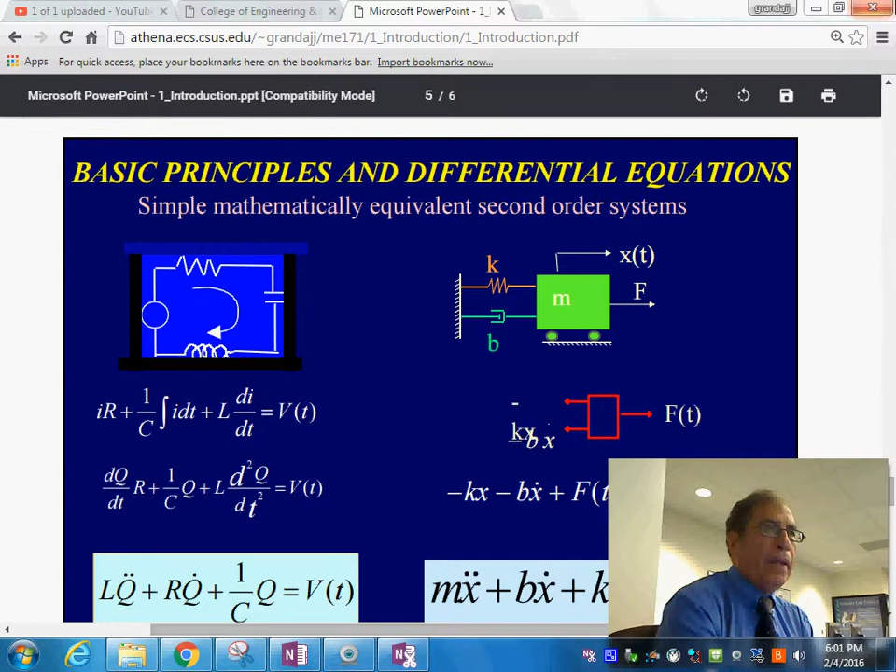Okay, so what I would like to do is to review this a little bit in here, how we do these differential equations for both kinds of systems. We have on the left the electrical system, and on the right the mechanical system. The reason I would like to do it this way is because I want you to see the similarities in how we analyze each one of the systems.

Because when you think about it, we need to do systems that are in both energy domains. But first of all, we're going to see that certain things are very similar, and there are elements in one system and the other that have about the same kind of functions, but in different energy domains. So we'll explore this system in parallel, both on the block diagram as well as on the bond graph method. So first, because we have the equations in there, we're going to go with the block diagram method.

And so we'll begin now by looking at this slide and seeing that we have a differential equation in here. The differential equation has been modified, and we have the differential equation on the bottom, even further modified to write it in this format down here. On the mechanical side, we have the system itself here. We have done a free body diagram of the system over here, and the differential equation has been derived applying Newton's law.

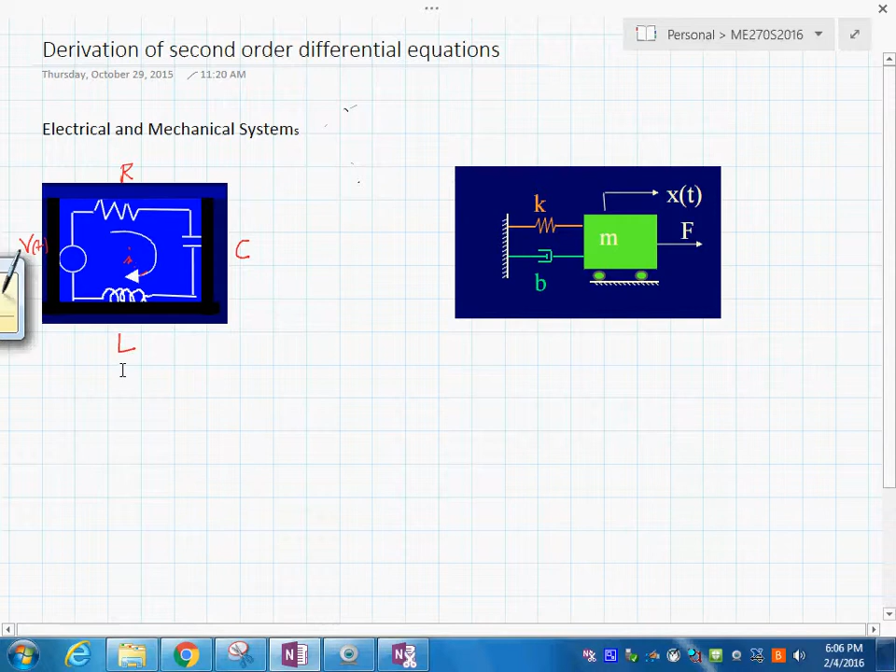So remember I like writing steps. So we could put the steps here on the electrical side, maybe I'll just do it here. Okay, let's just call it the steps. What did I just do? I moved it over when I shouldn't. Okay, here. Steps.

Okay, the first step would be, I would say, recognize the elements we have. So we have done that. It's got an R element, a C element, and an inductor in there. Then the second thing we're going to do is to write the equations according to Kirchhoff's laws.

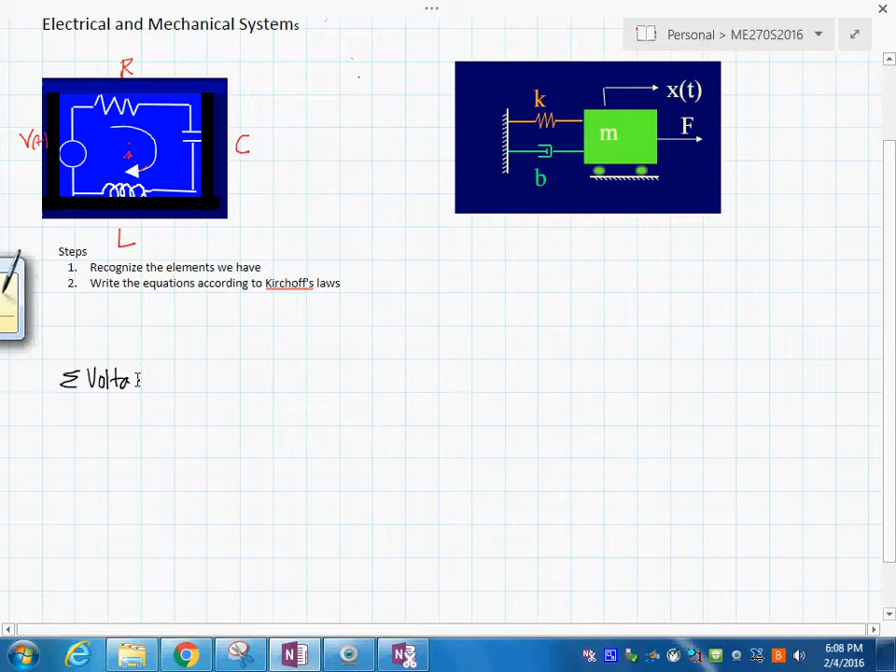So this is the situation here that we need to apply those laws right now. So let me leave a little space so that we still have some place to write, but I am going to begin right here. Okay, so Kirchhoff's law says that the summation of the voltages around a loop is equal to 0. Or you could say the source voltage is equal to the voltage drops of each one. You have voltage of R plus voltage of C plus voltage of L.

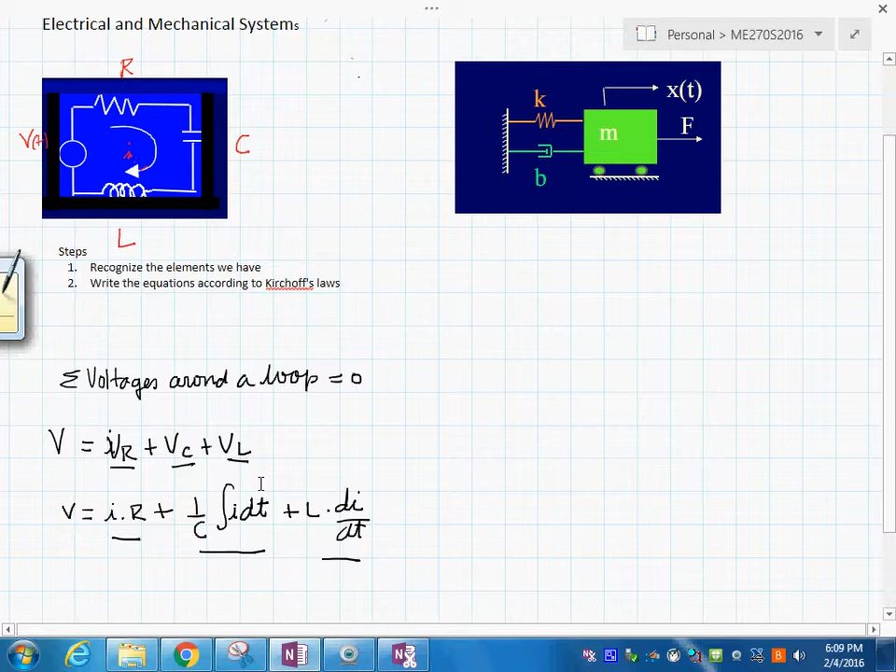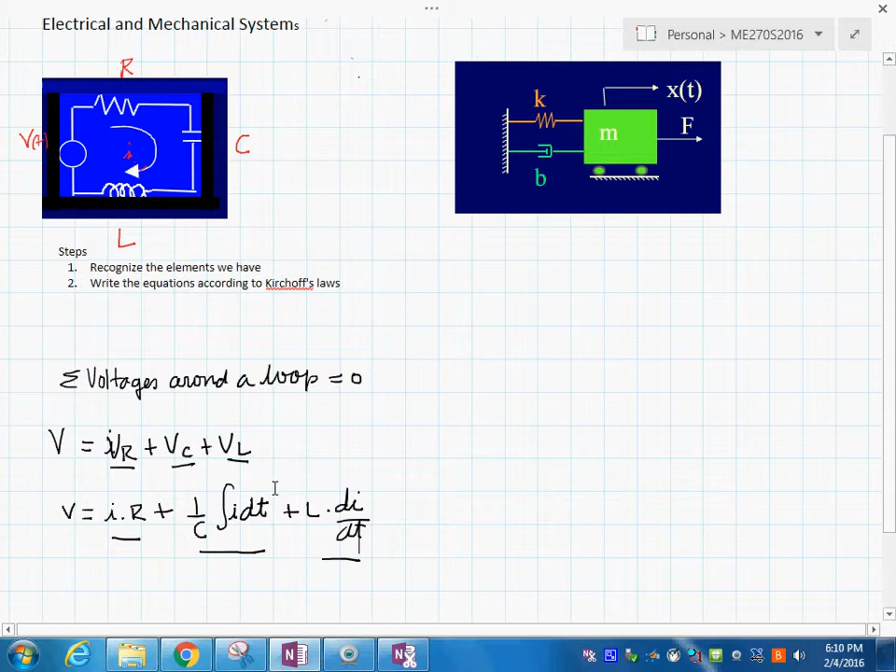So if this is true, you will have that voltage equals I times R plus 1 over C the integral of I dt, and then plus L times di/dt, see? So this is the voltage on the resistor, this is the voltage of the C element, and this is the voltage of the inductor. So you see, here we have this differential equation, but it is written in a mixed format because it has integration and it has differentiation. And we cannot use it this way. We need to have it all as a differential equation.

So what we need to do is replace the current with its equivalent, dq/dt, see? So if this is true, therefore you have that voltage is equal to dq/dt times R plus 1 over C times the integral of dq/dt dt, right? Plus L times d²q/dt². So we put it in terms of the q variable.

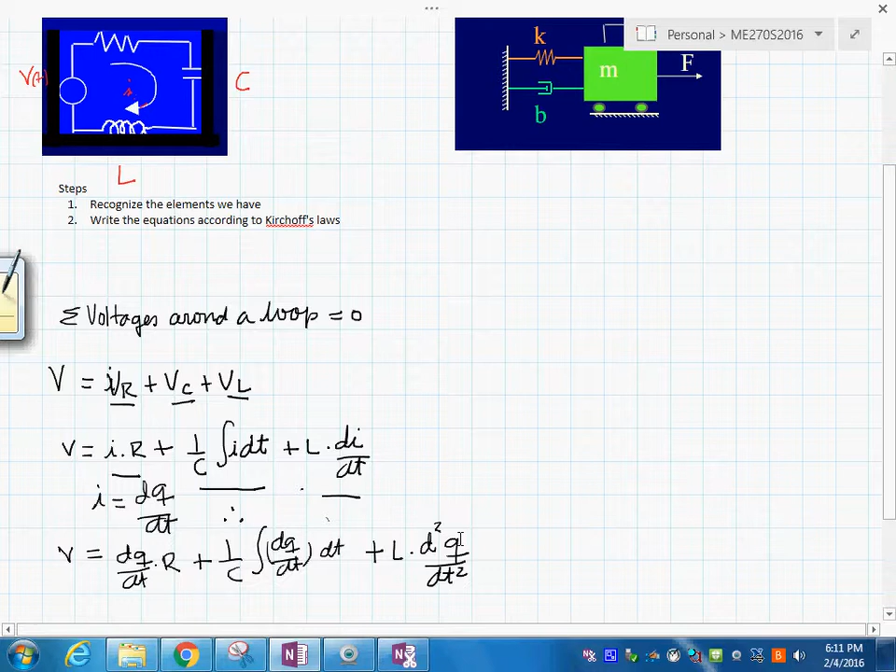So let's reduce this. You can rewrite this equation in terms of the highest derivative. You can say that L times d²q/dt² is equal to v minus R times dq/dt minus 1 over C times q. See?

So what we need in this case, as a third step after we apply the Kirchhoff's law, you could say: express the differential equations in second order form, meaning do this substitution of variables that I is equal to dq/dt, and then we have a second order differential equation. And then organize in terms of the highest derivative. So the highest derivative term is L d²q/dt².

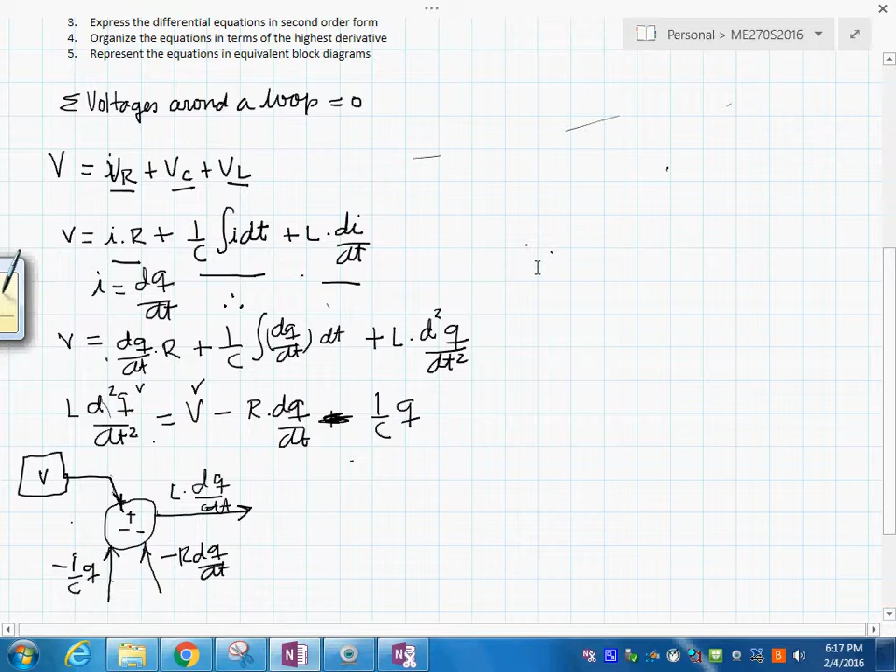Okay, so here you have this v. So we have checked this term. And now these other two, they are two negative ones that we need to add to this block diagram. One of those is going to be like a kx type element. Okay, so we're going to write the other two in here: minus 1 over C times q and minus R times dq/dt. See, again with minus signs, plus minus minus. This is the very basic graph so that we can actually draw the rest of it.

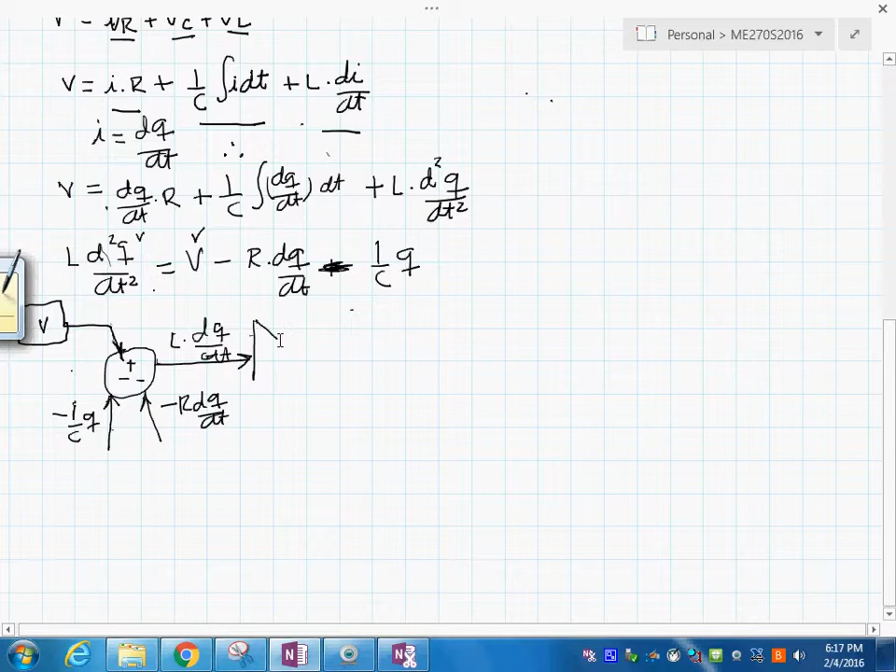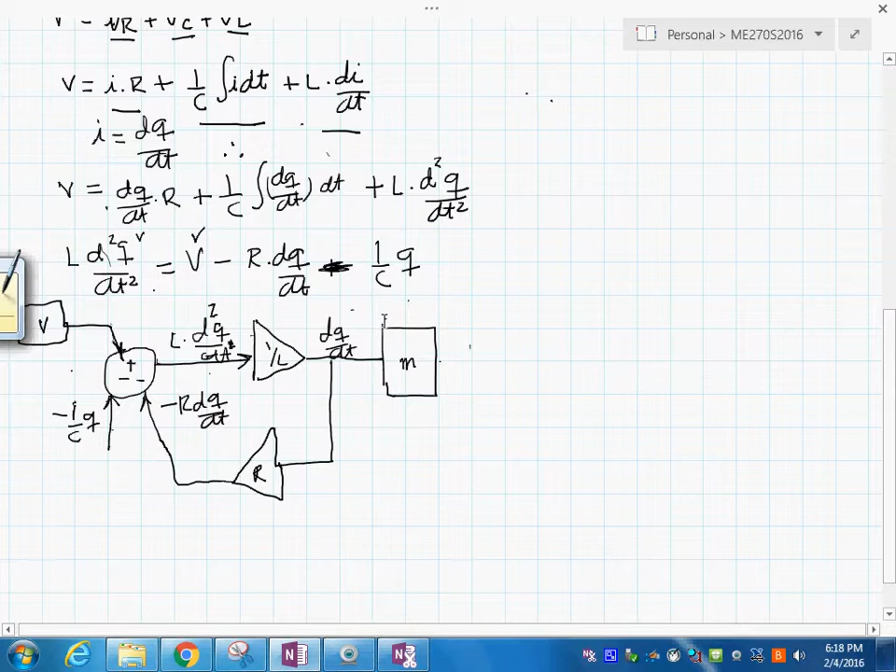So here, what we need to do is first we divide by L, then you have that this is dq/dt. Is the dq/dt a second order? No, the one at the top is this one. So you see, this has R times dq/dt. You have this dq/dt, and then you multiply by R. And the second one is 1 over S.

I think we have a little bit of correction to make here. We need to integrate this thing twice. So here we're going to integrate once, and then 1 over S the second time. So this would be dq/dt, and this one here, see? This would be q.

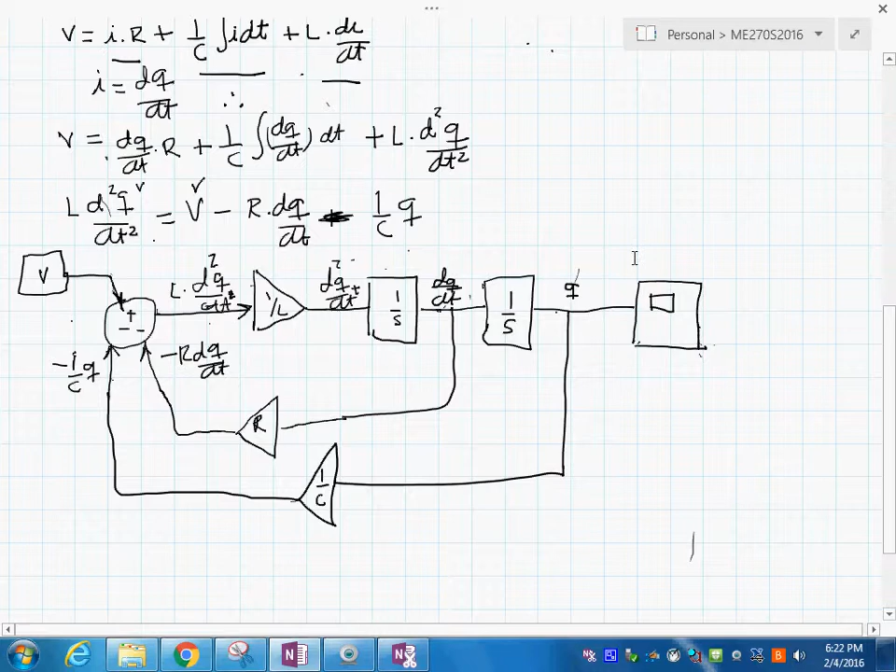Okay, so we are ready to put it into Simulink now. And that's what we should do next. And then we should try the mechanical system later on. This is the idea, this in here. Okay.

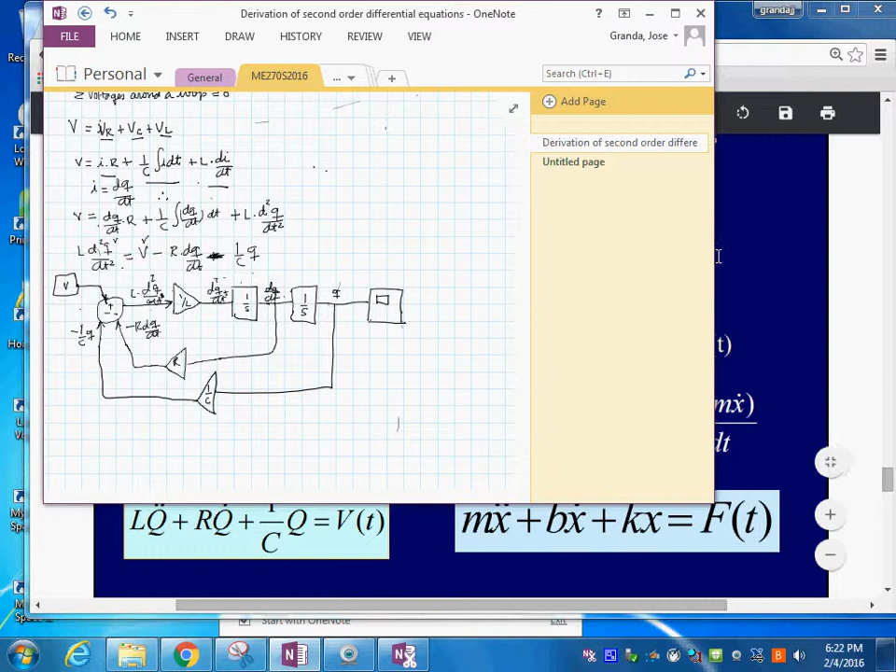So we'll reduce it to the point that we could just see it on Simulink. So we're gonna leave it here for now, and then we're gonna go and start MATLAB and go to Simulink. All right.

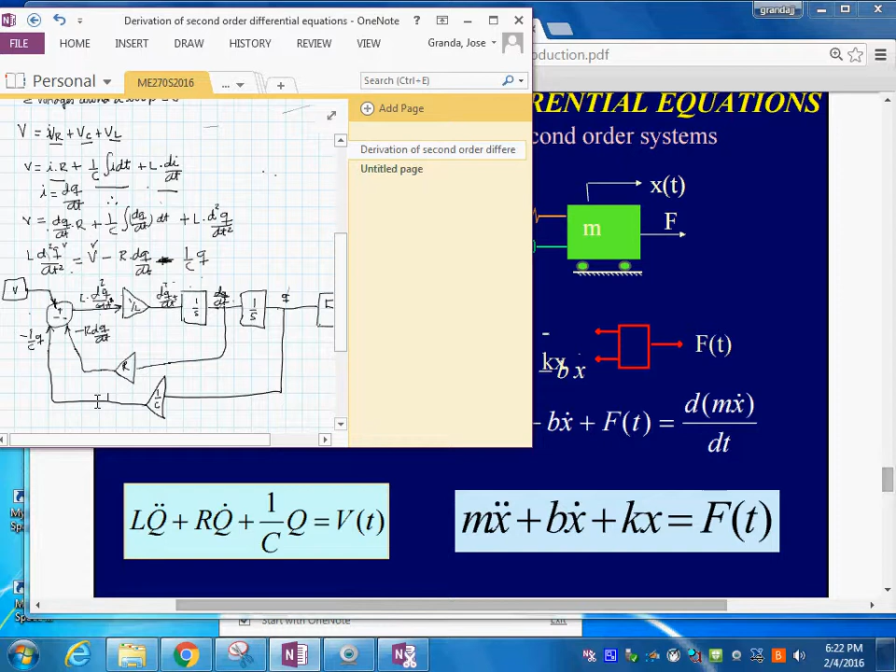Okay, so we have to wait for a moment until MATLAB comes up, and what we're going to do is to get the description of this block diagram into Simulink. So we have to wait for a little bit until we get the MATLAB prompt. At the prompt, we enter the word Simulink, and MATLAB will actually run Simulink, which is a tool from MATLAB.

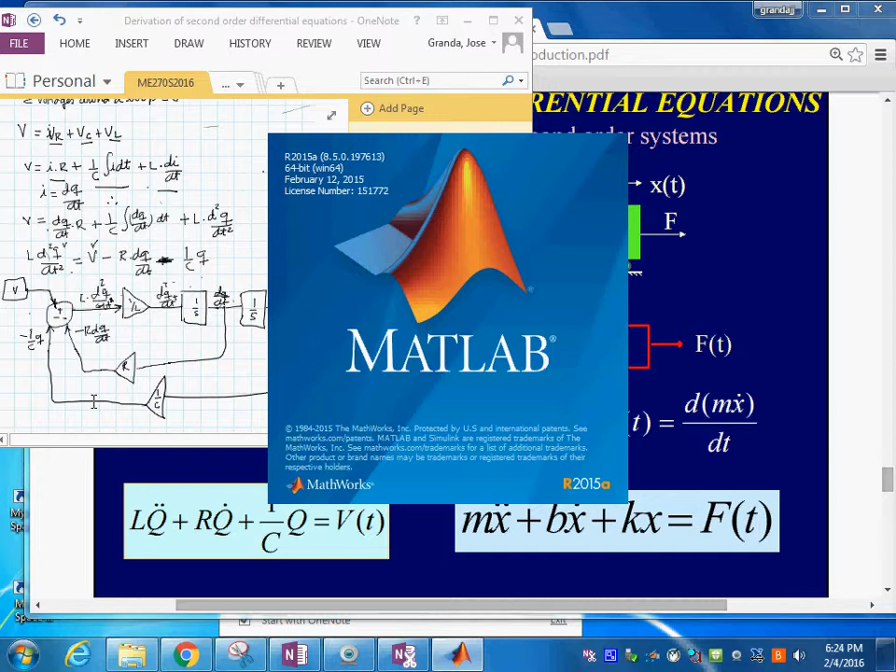So MATLAB has a bunch of other tools for calculation, but in here for this purpose, we want a file that can load things ahead of time, so it won't be so slow. So a little bit of waiting here until MATLAB comes up. Yep. Okay, so now it came up. We are at the prompt and we're gonna type Simulink. Oops, no.

Yeah, we type Simulink, and so now what it's gonna do is give us a workspace in there, some section of the disk that we can write and do exercises.

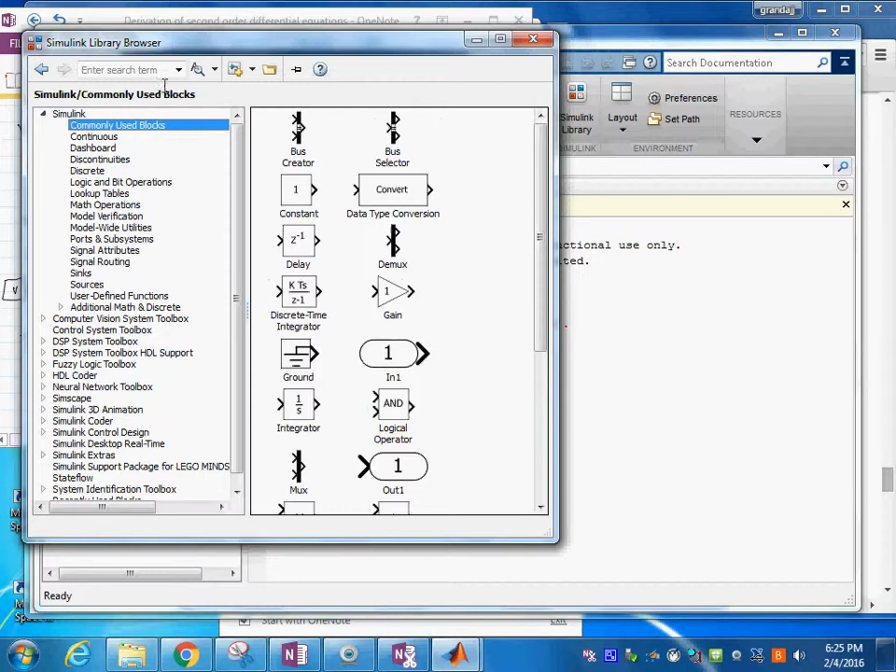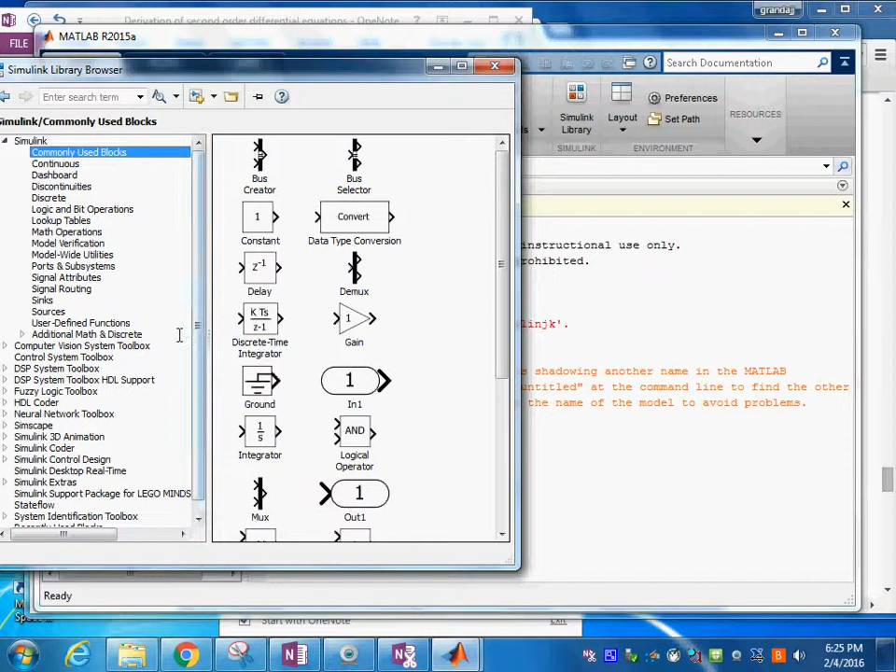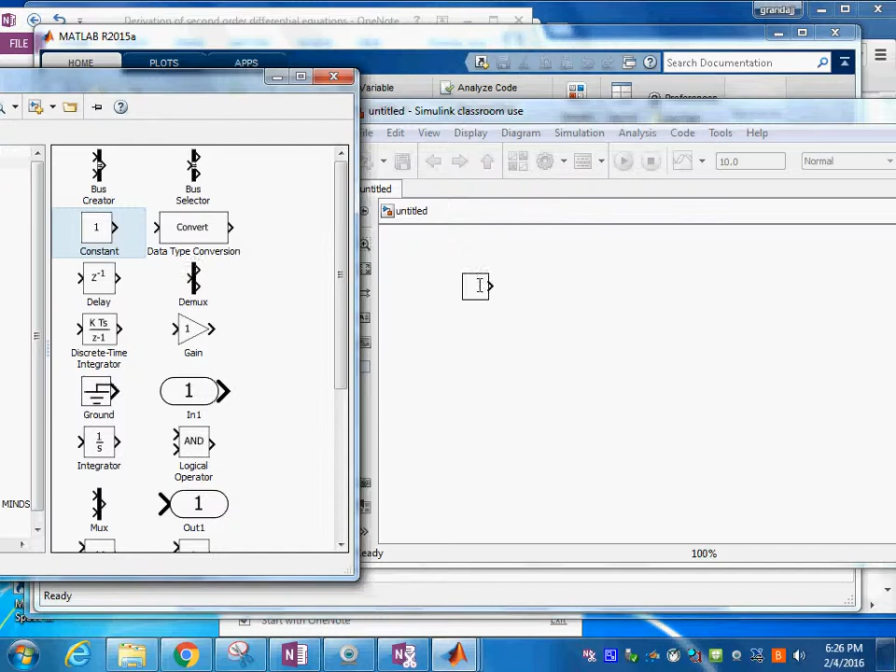There we go. Simulink came up and gave us this. If you click on new file, then we can transfer everything. Yeah, there we go. We're gonna transfer the elements that we need. We need like 3 of these.

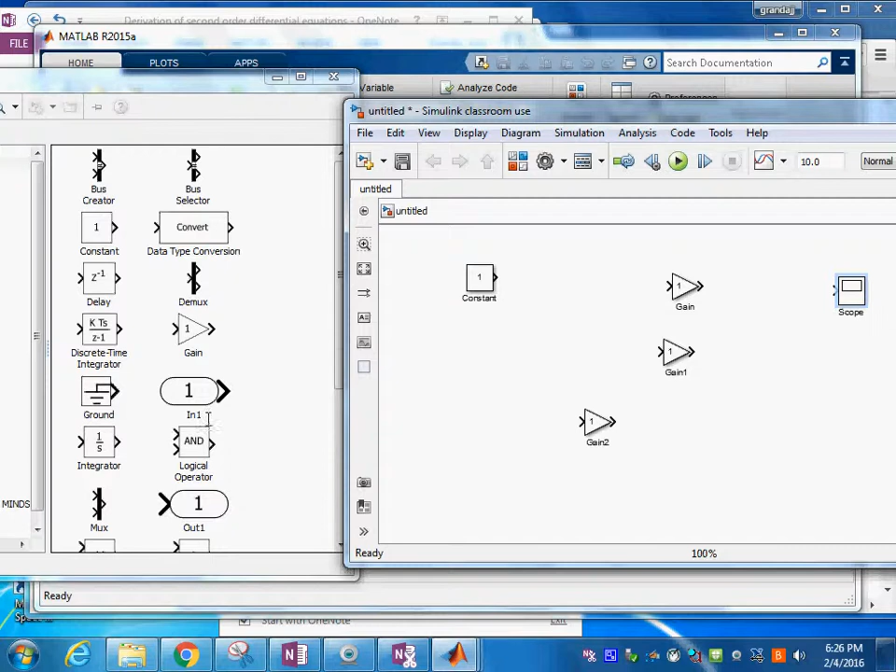Okay, so we still need some others from here. We need a scope. The scope allows us to measure things. Okay. We need the summation point. Where is the summation point? On one end. Right here. And I believe that's about right.

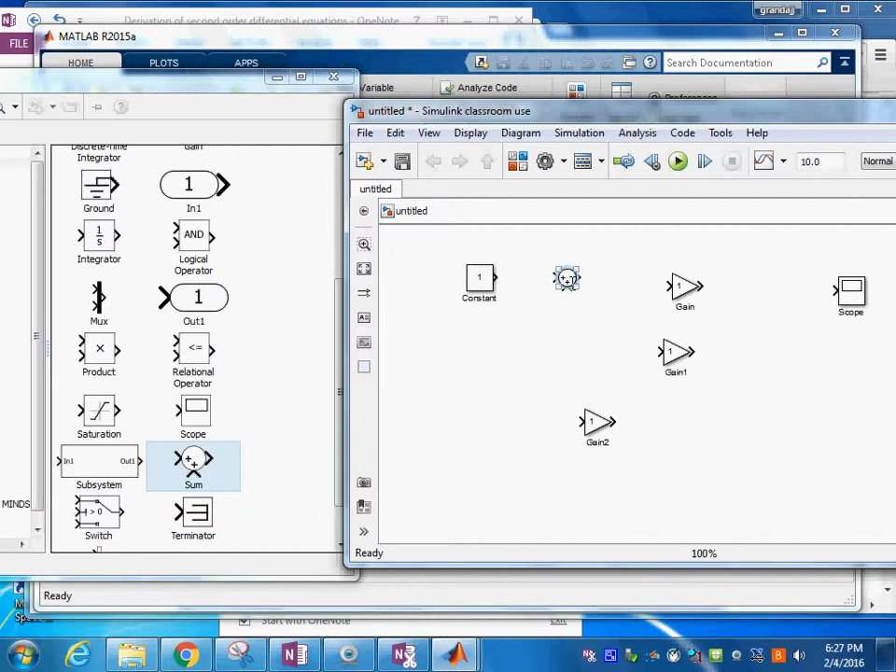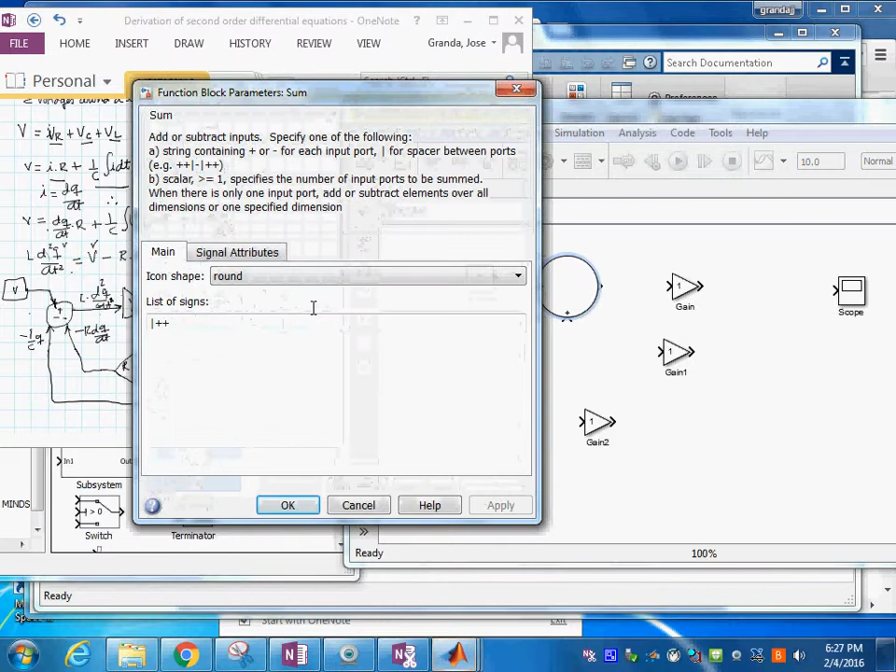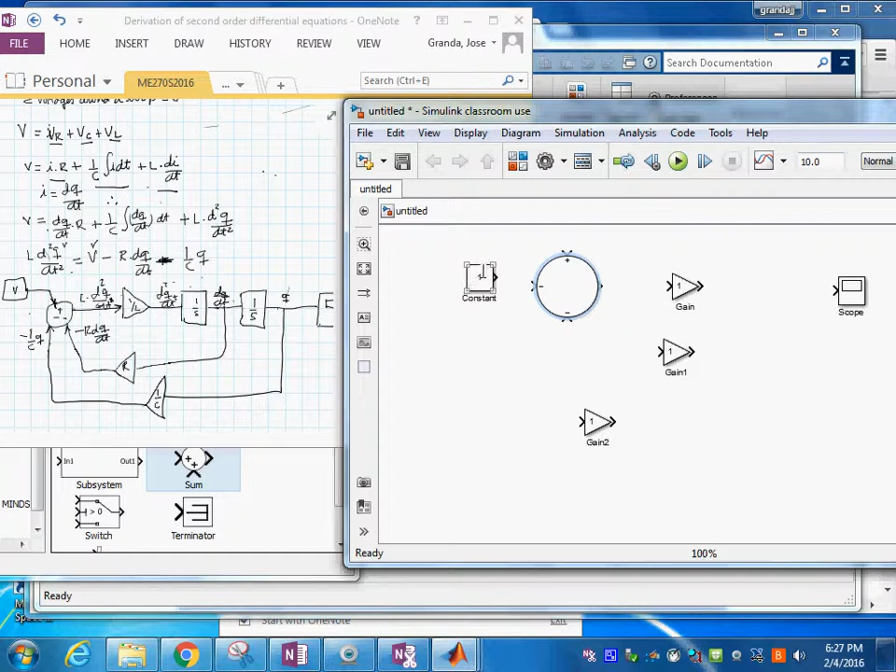So what we need to do is on this one, you see, we're gonna rename it the way we want it. Yeah. So here we have, oh, we have to put 1 positive and 2 negatives. So positive, plus, and minus, minus. That allows us better distribution. And then you have these ones.

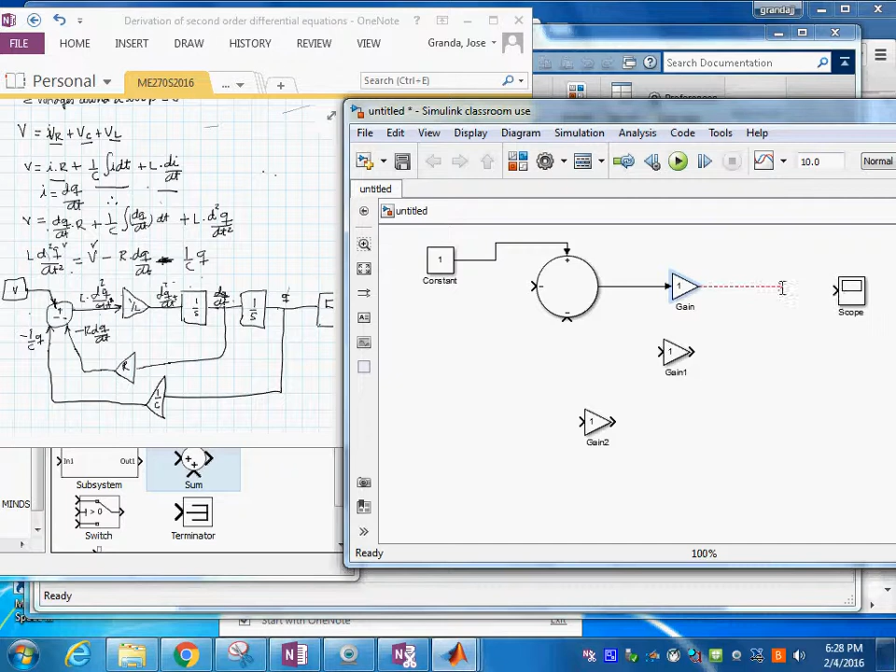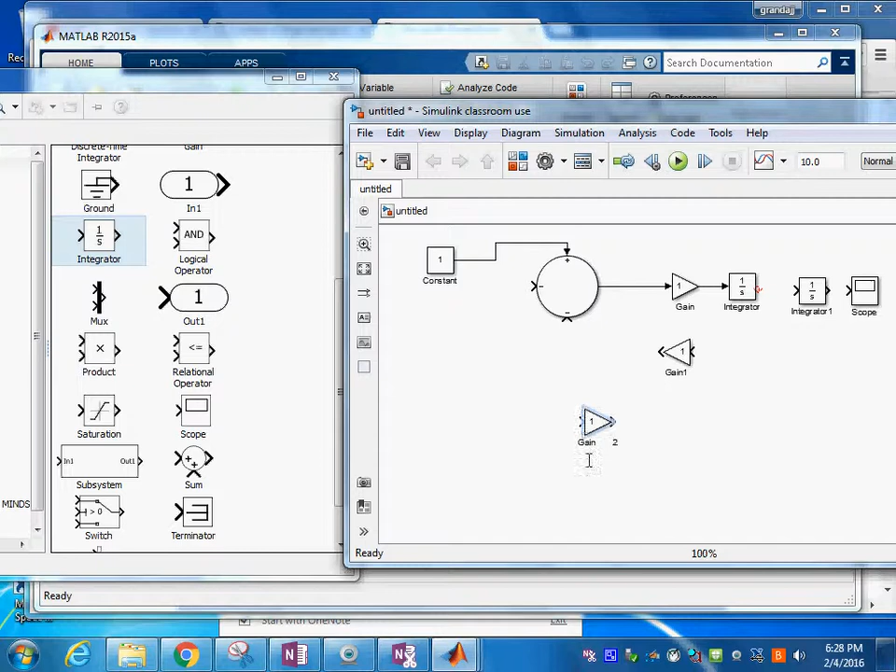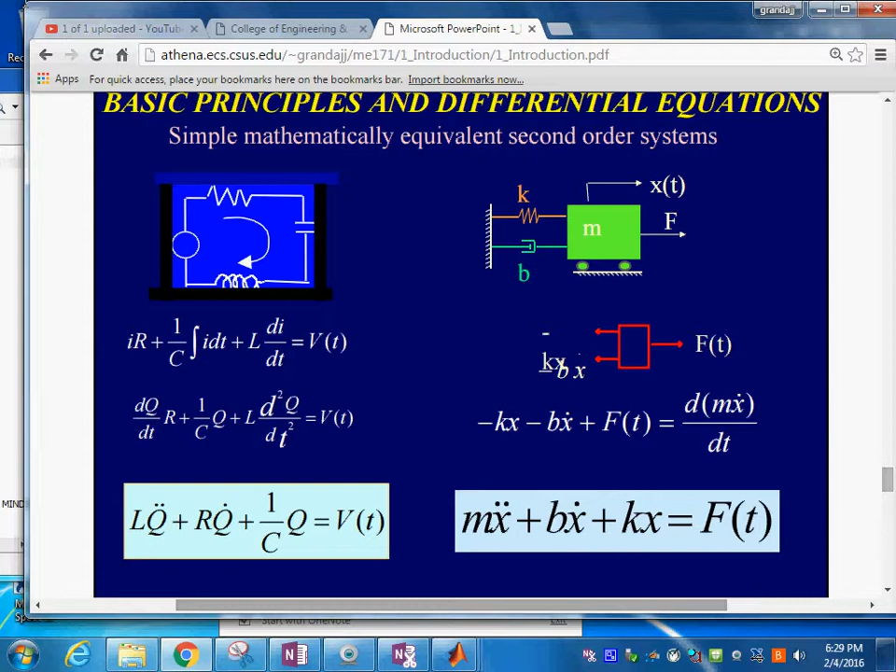We need the integrators. I knew there was something that we're still missing here. This one. We need 2 of these guys. These ones, we need to flip them over. We do a Control I. Yeah. So in here you have this. Oh, we still need to fix this.

And then we're gonna put this one connected to this. This one didn't make quite a good connection.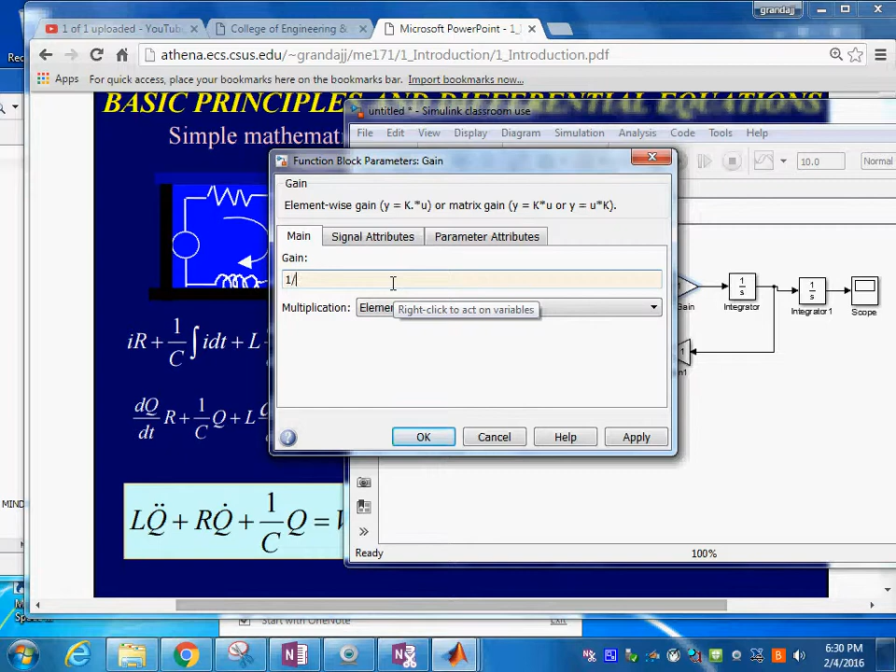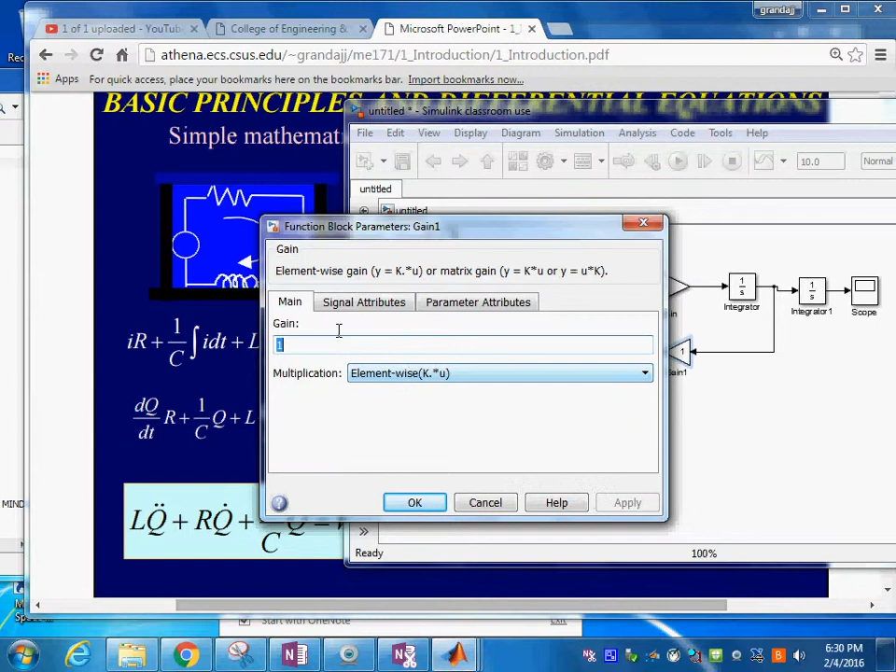So we need to put some values into this. This is going to be our voltage. We're gonna use the letters. So this is 1 over, was 1 over L, right? Okay. And then let's just make it a little bigger so we notice the way it is. This is the B variable.

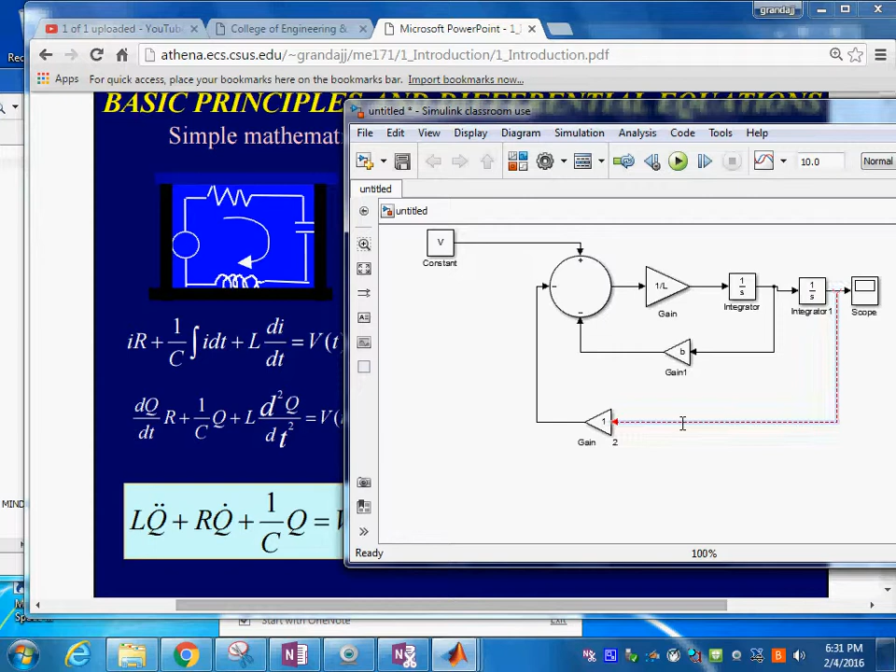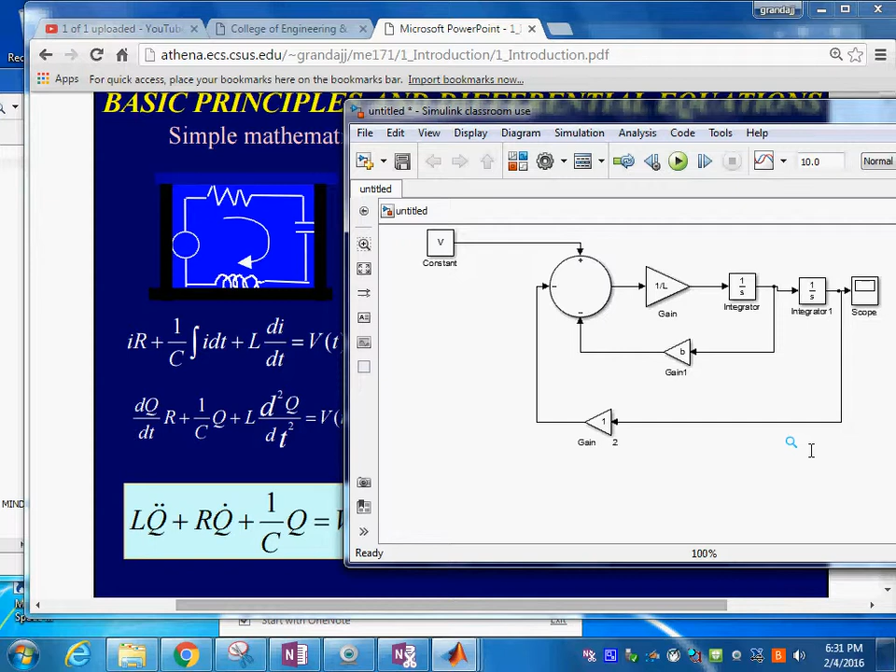And we have what happened here. We need one last connection to this. It didn't quite do it. If it is red, it's not connected correctly. Yeah, there you go. So if we had some numbers and values in here, we just run the simulation.

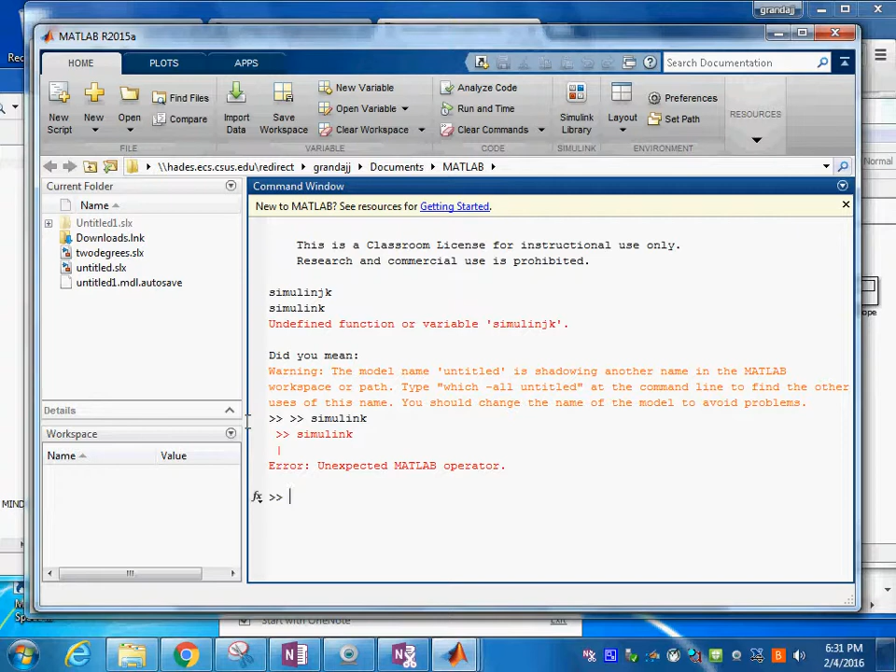So we're gonna use this in here and put the numbers in here. The numbers would be something like L equals 1. What else do we have? K. Let's see. What else do we have? We have L you need to define, and R and 1 over C and B.

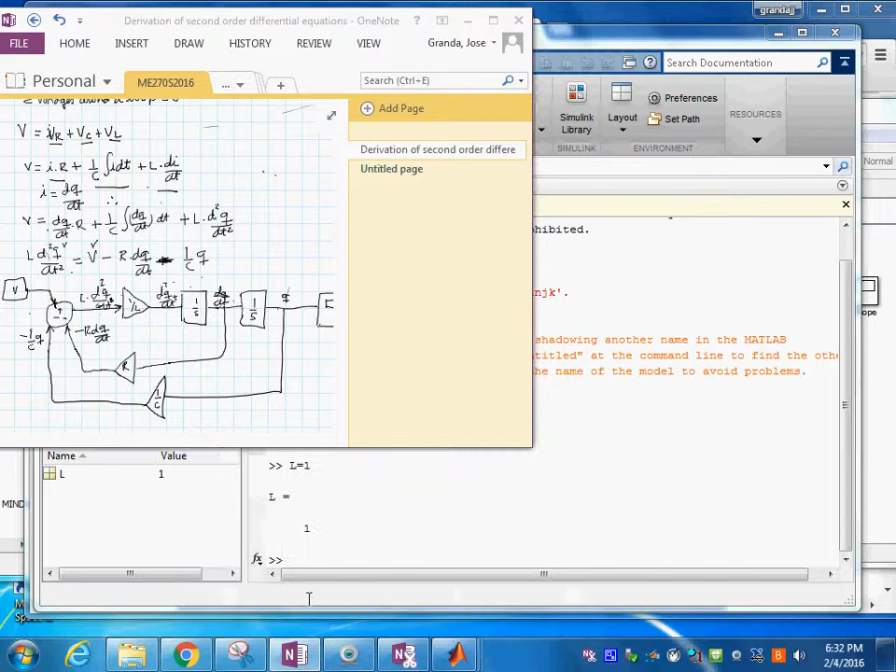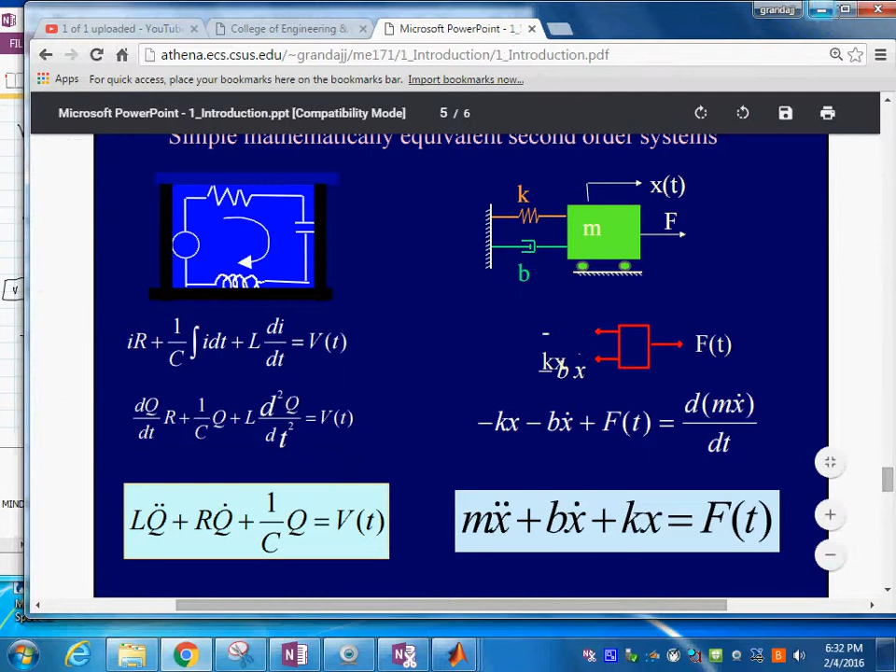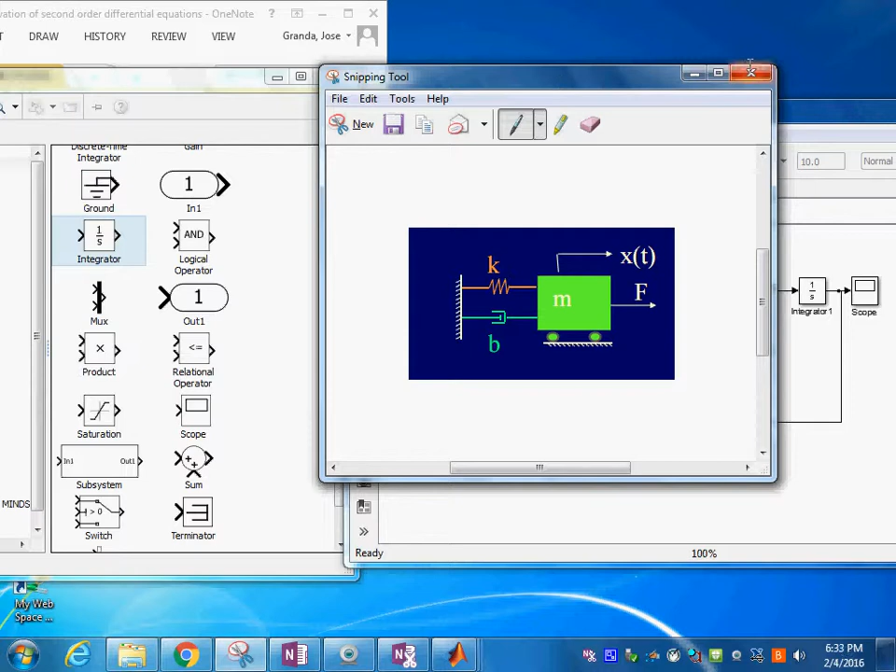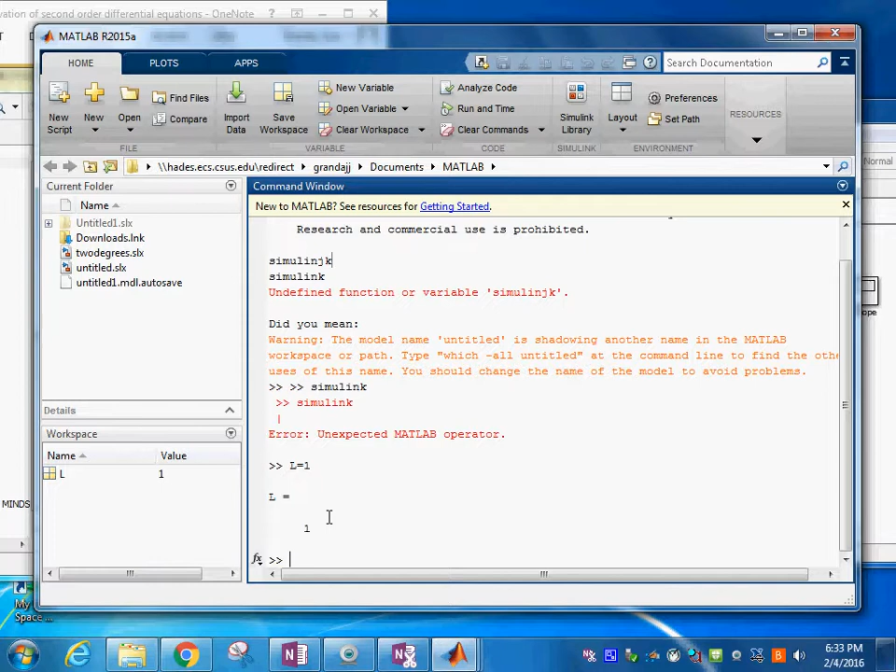So now we have transferred this into this. So it's time for us to give it some values and see if it actually works. So I am going to put this... so where's the MATLAB prompt? Right here. So L is equal to 1, R is equal to 2.

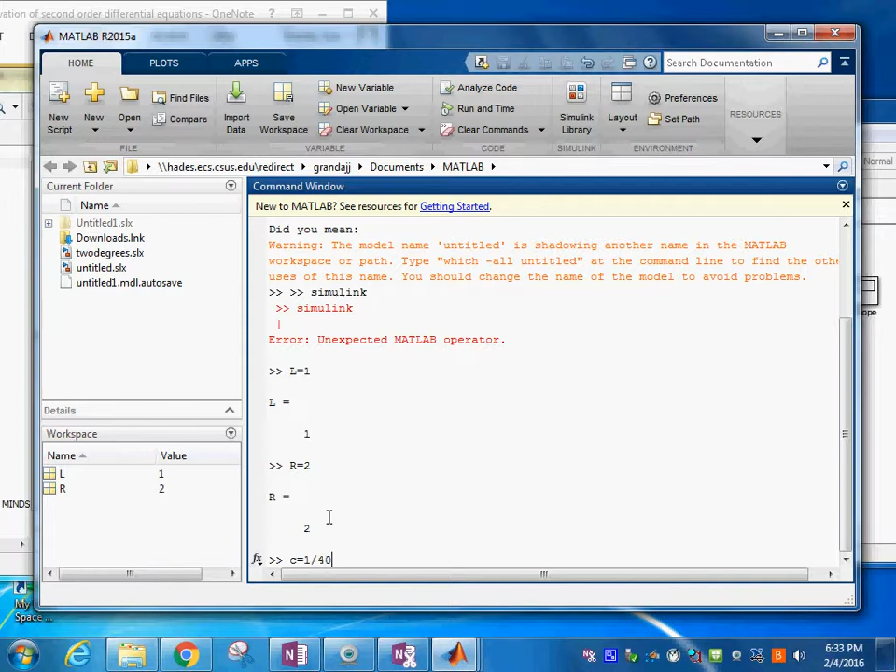Then we have L is equal to, see, they are what? You already defined L. We need to define C. I think it's lowercase c. This is going to be 1 over 40 like this. Okay, and then B. B is, this is going to be a 5.

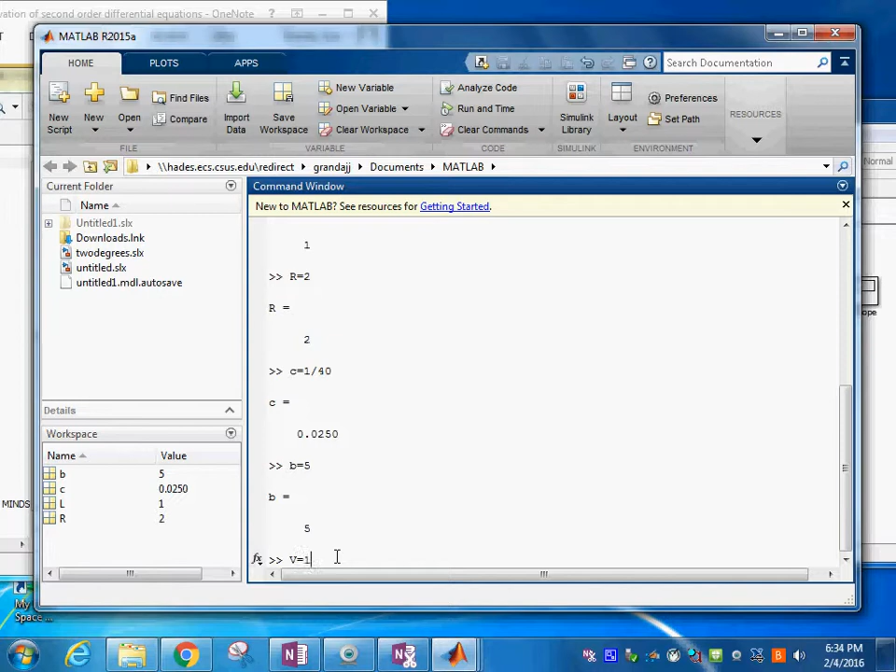It's not that, it's B. What? It's the voltage. So V. Oh, the voltage also we need. The voltage equals 10, let's say. Yeah, with all these values in, we can go in here and then run the simulation.

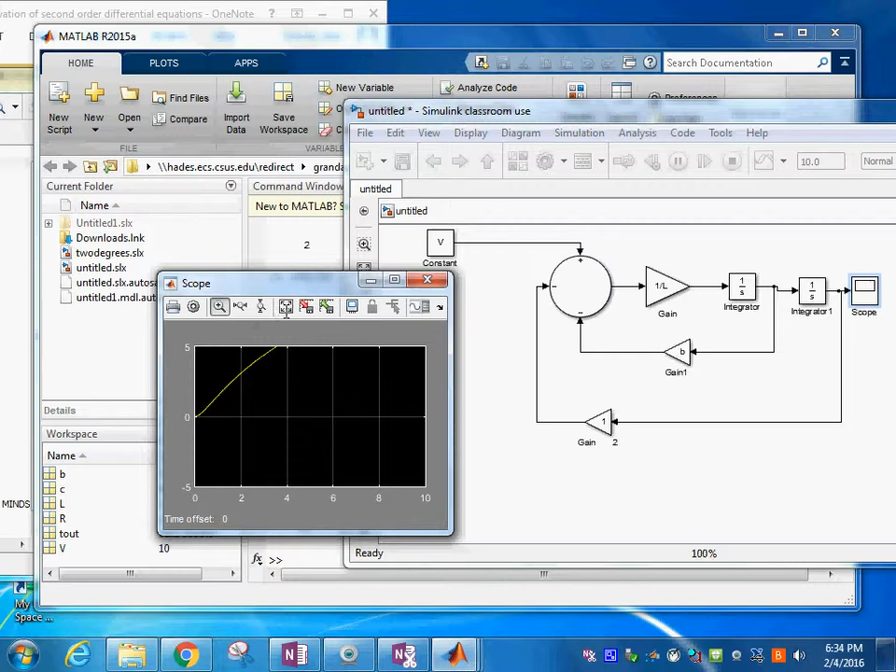You're missing the variable. Am I? Yeah, one. Which one? Oh, you're missing. Something is, okay. What variable do we have? C, 1 over C. Oh, this one is 1 over C, like this. Okay. So let's try again. The other triangle is off. Yeah, we do this, then everything is cool, and it's actually correct.

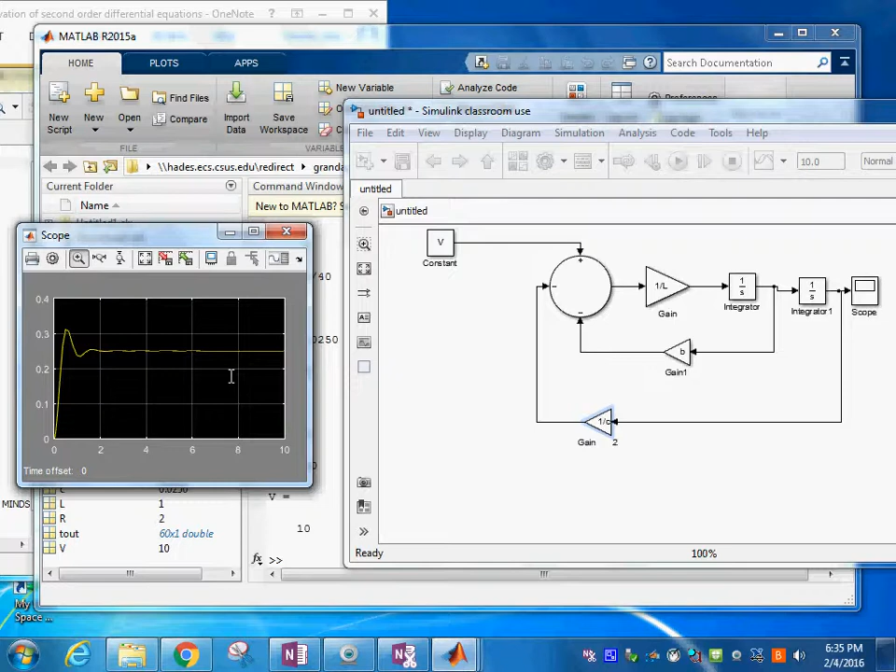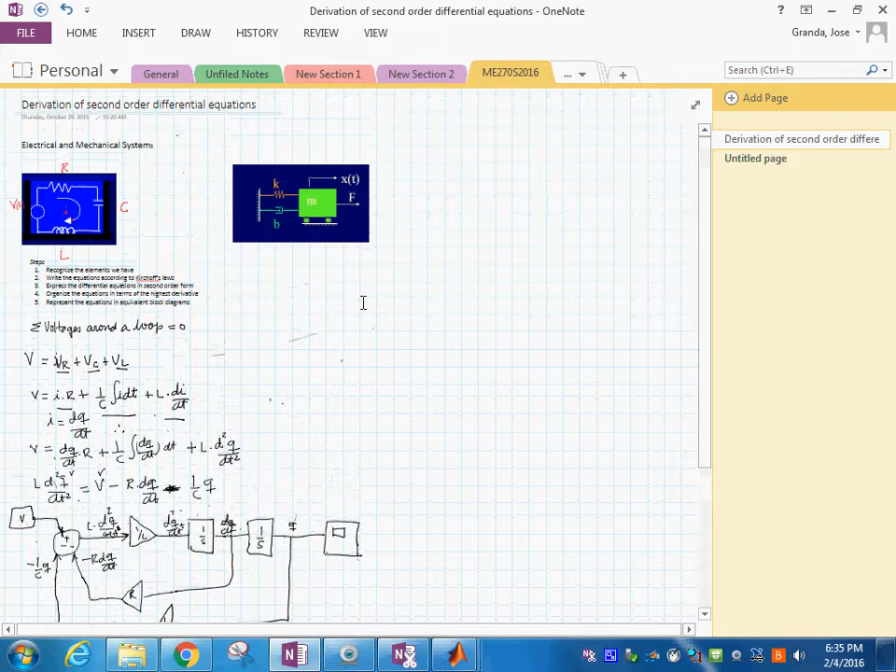So this is the simulation for the electrical system. So we have gone through the steps. Let's just review the steps in here to make sure that we have it all in one place, what we did. So represent the equations in equivalent block diagrams. Then you could say run simulation in Simulink. Yeah, Simulink.

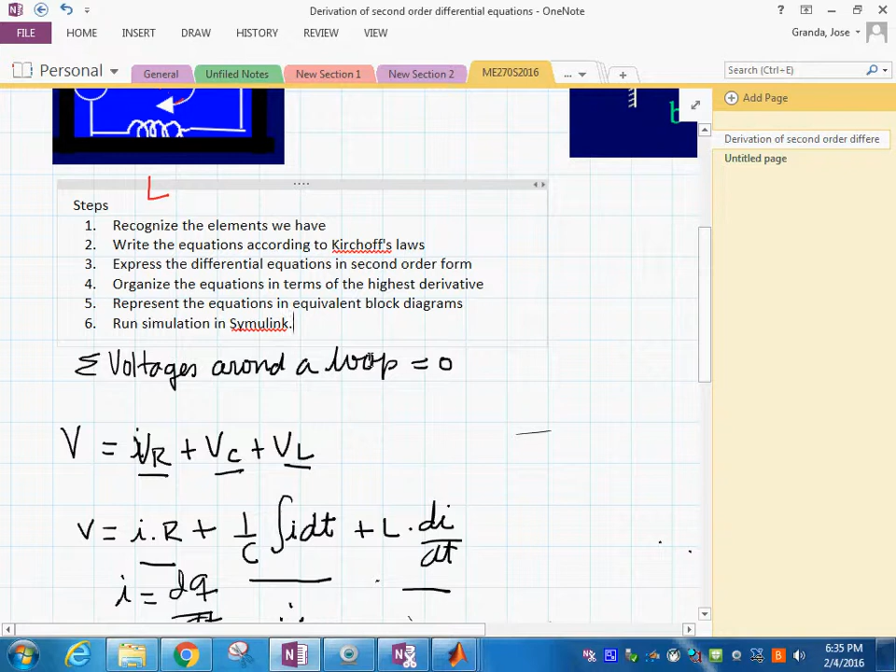Okay, so this is for the electrical side, and for the mechanical side we can do the same thing, following a process to do the differential equations, but in this case, Newton's laws are going to apply. So in this case, we are going to apply Newton's laws, and we're gonna go to step number 1. This is going to be make a free body diagram of applied forces.

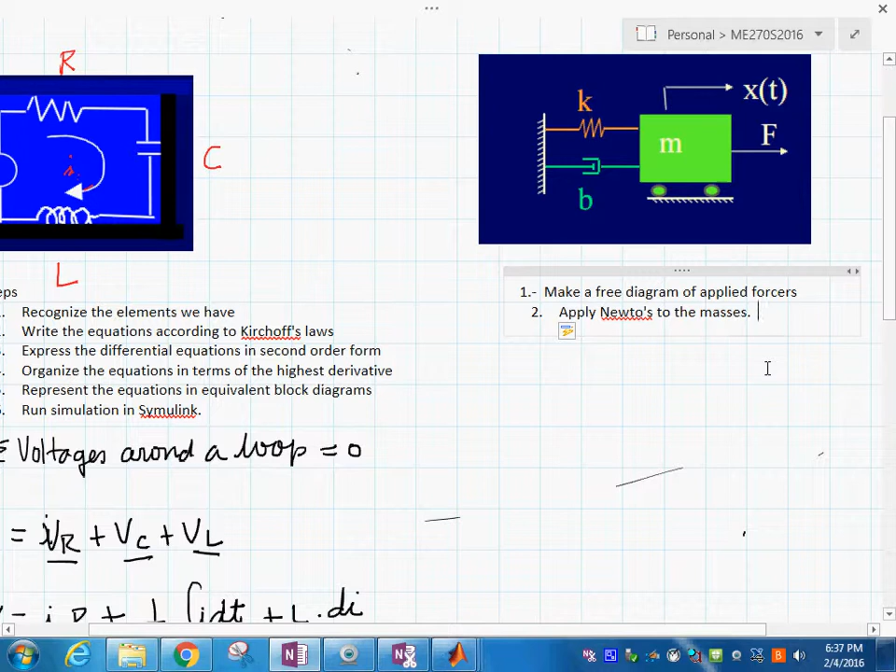Then apply Newton's law. Say 2, apply Newton's law to the masses. Just very briefly, here says apply Newton's law. That means summation of forces equals the rate of change of momentum.

Okay, so that's what we're going to do next. We will go on ahead and apply this, and then we're going to see here summation of the forces. So in here we have the free body diagram. I'm going to give some room so we can write over there.

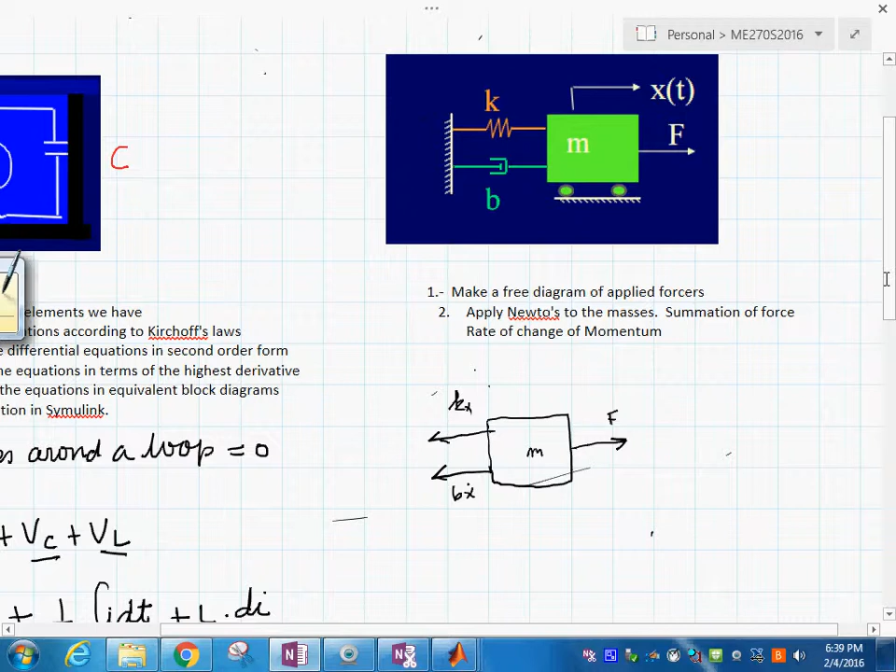Okay, so having this diagram allows us to apply the summation of forces equal mass times acceleration, right? So this would be F minus K times X minus B times X dot is equal to m x double dot, like this. The spring is not going the other way? No, because we put X this way, right? So when we move this, the spring is going to oppose the motion. So once we have it this way, it's pretty much the same process.

We create a block diagram. This is part of it. This is F. This is m x double dot. And in here, you see you have these two negative terms: minus K times X, and over here, B times X dot. Is it 1 over m? We still haven't done that yet.

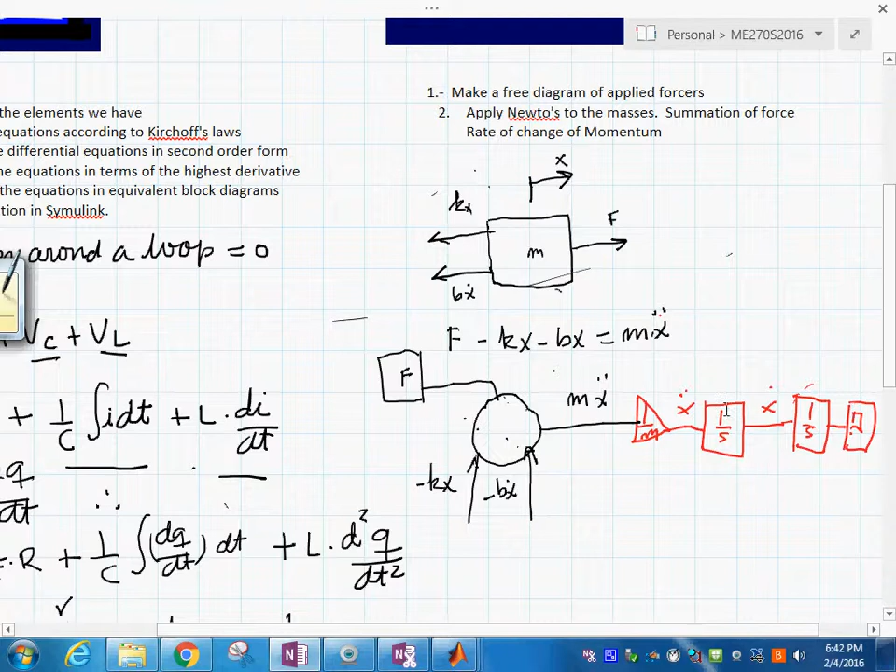Alright? But you see, what you have in here is very similar to the electrical system, and here you have this feedback for B, and then you have this other one over here. This would be the feedback for 1 over C in this case. Like that, see? Once you have this block diagram, putting it into Simulink is the same as we did with the other system.

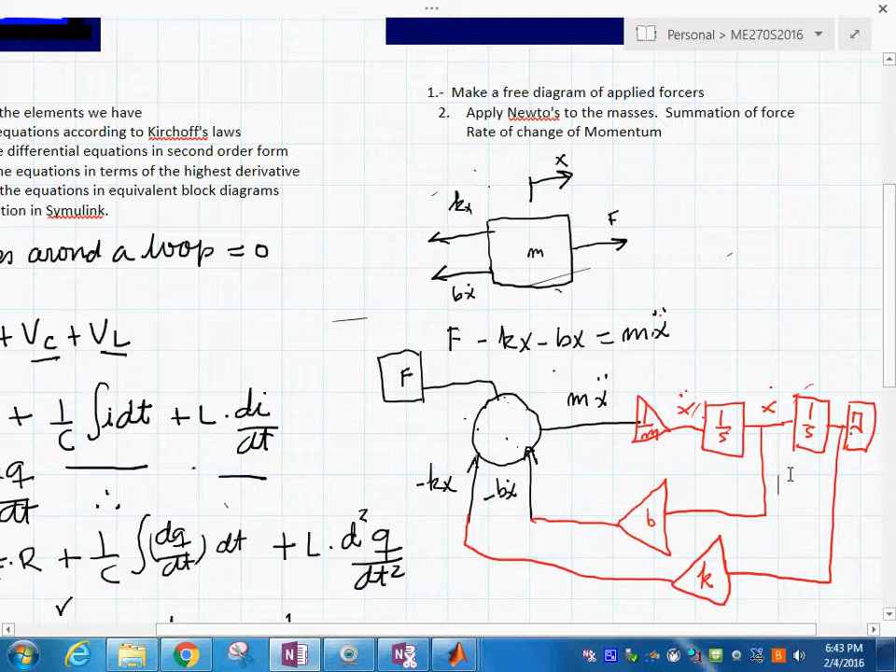So just to summarize, you have a set of steps for the electrical system, and a set of steps for the mechanical system. Here, we could just add step 3, transform the equations into block diagrams. And then finally, perform the simulation.

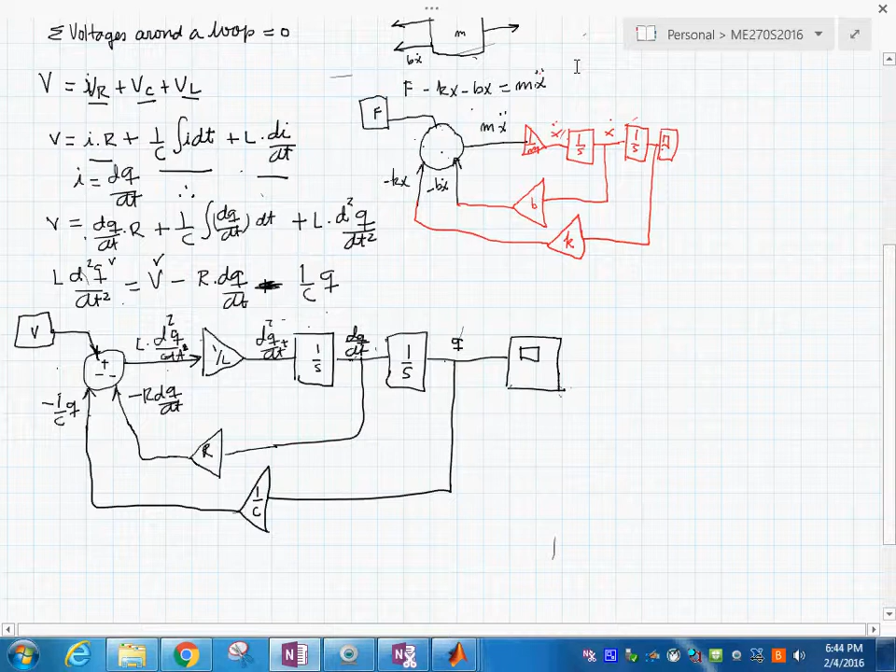So that way you have seen how we go about doing it. In this case, we didn't have to put it in terms of the highest derivative because it was already there. And then we translate this into the Simulink file, and it will work the same as the other.